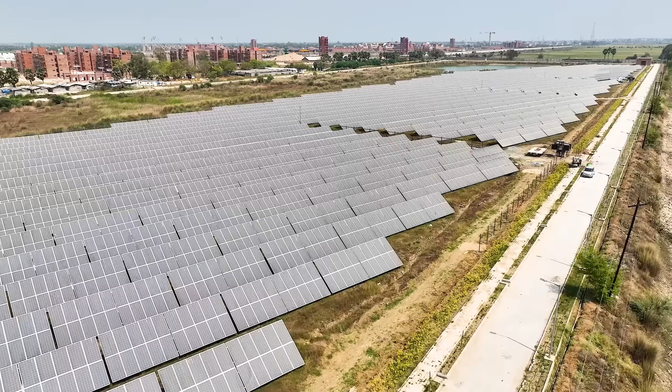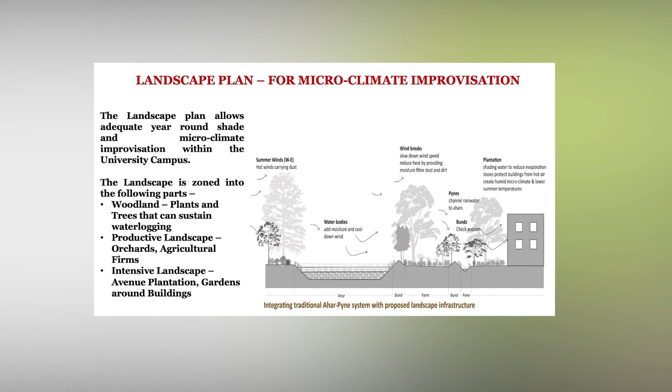The Nalanda University campus is probably the world's largest net zero sustainable green campus. The key sustainability features for developing this net zero campus include net zero energy, net zero water, net zero waste and net zero emission. This hybrid concept, featuring renewable energy sources with the indigenous approach in its integration with various innovative technologies, shall undoubtedly exemplify rational approaches to construction of other upcoming projects, campuses and community construction models in future.

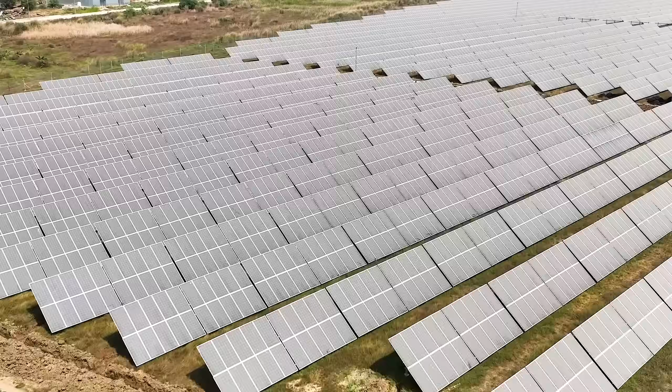The campus combines state-of-the-art technologies with planning principles of the ancient Nalanda University to create a carbon-neutral and zero-waste campus. Some of the most important and indigenous aspects and palette of concepts for passive methods operating at different scales are 6.5 MW solar PV captive power plant, 1.2 MW biogas plant, desiccant evaporative technology for cooling, heating of the buildings,

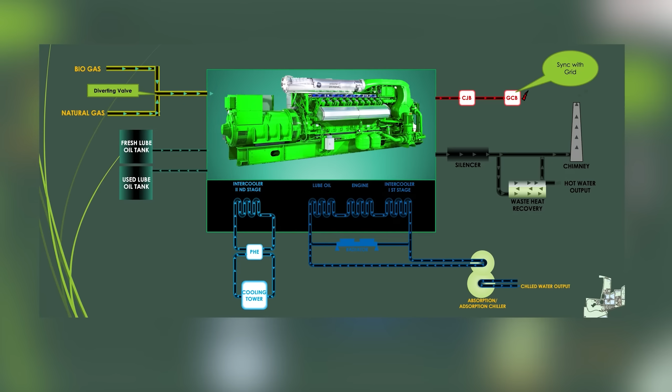solar integrated thermal storage technology for HVAC system, use of compressed stabilized earth blocks instead of common burnt clay bricks, thick cavity walls to increase thermal resistance, climate-appropriate landscape design to reduce potable water demand, decentralized water treatment systems, cooling as well as cleaning of the air through use of selected native plants, building management system, etc.

The main entry gate symbolizes the university as the temple of knowledge acquisition and a seat of higher learning. The first gate along the main road is the first threshold, marking the entry to the campus. The next grand entry gate, 7.5 meters wide, forms the neck, screening people and vehicles in. The large, curved volume creates a sense of pause and calm as felt in the temple entrances.

The academic spine is spanning in the north-south direction of the campus. It houses around 40 various capacity classrooms with a total capacity of 1890 students, varying from 25 to 300-seater classrooms, an examination center, international relations office, placement cell, meeting or discussion rooms of various sizes and other common facilities like faculty offices, laboratories, 100-seater mini auditorium, etc.

In the southern side of the spine, the Grand Sushma Swaraj Auditorium is situated, followed by two guest houses, namely, Campus Inn and International Center. The academic spine is grand, welcomed by a huge semicircular catenary.

The Grand Amphitheatre, with a capacity of around 2,000 spectators, is situated amidst the center of the Kamal Sagar, the central water body. The amphitheatre has a green room and a dais at its center. The structure is surrounded by the huge water body, which gives the audience sitting in the amphitheatre an extravagant picturesque view featuring the lake in the backdrop.

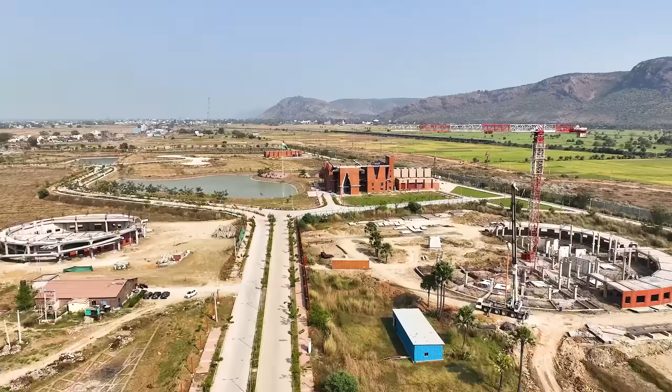The amphitheatre is surrounded by another circular 11 amenity modules, as seen in the aerial view, for informal discussions, small gatherings, chilling out space, etc. The administrative building is the backbone of the governance structure. This building with two wings is situated in the eastern part of the campus. The university administration, comprising of the Vice-Chancellor's Secretariat, the administration, and the finance, are housed in these two wings.

In the northern side of the building, the huge 30 feet by 20 feet Indian tricolor mounted on a 108 feet tall flag mast multiplies the magnanimity and pride of the campus. The ahars and pynes, as a part of the Net Zero Sustainable Campus Water Management System, add to the exquisiteness of the aesthetics of the building. Like the rest of the campus, this building is also environment resilient and reduces carbon footprint, be it in the form of usage of construction material, methodology adopted, or the strategic energy including water consumption techniques.

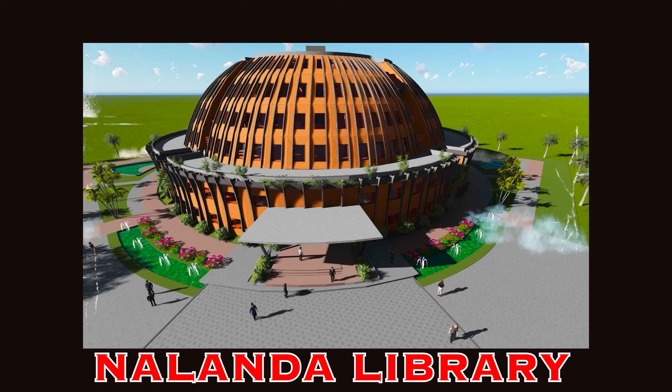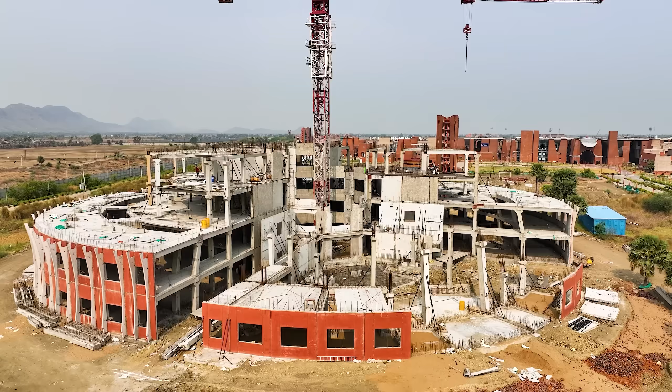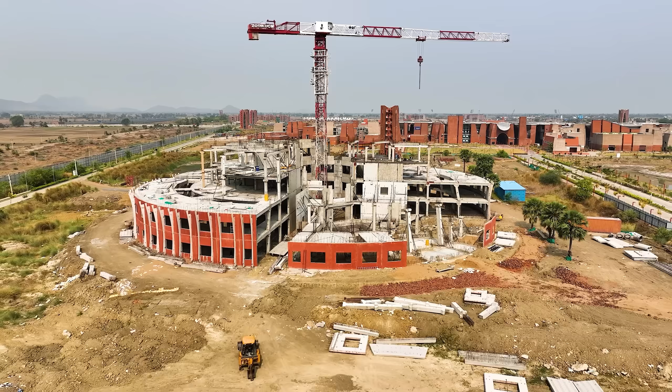The Nalanda Central Library building is envisioned to provide state-of-the-art facilities for study and multidimensional development of intellect and a locus for collaboration. The building has a built-up area of 17,545 square meters. With more than 3 lakh books volume and over 3,000 user capacity, the huge Nalanda Library building is being built in ground plus 5 floors.

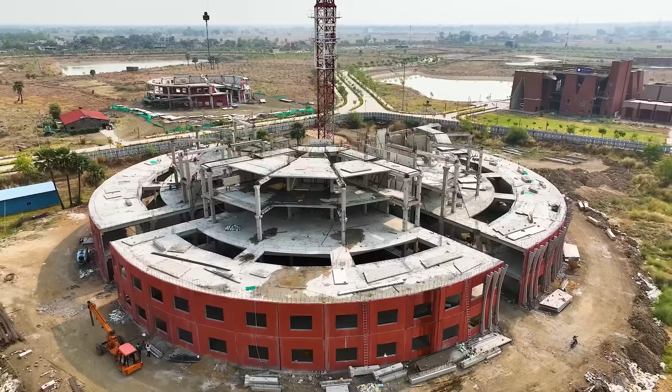The building is shaped as a spherical stupa divided in 4 quadrants with an outer radius of 81 meters at base and height of the building at crown is 26 meters, which makes it probably the biggest dome in the world. The works for construction of this building are in full swing.

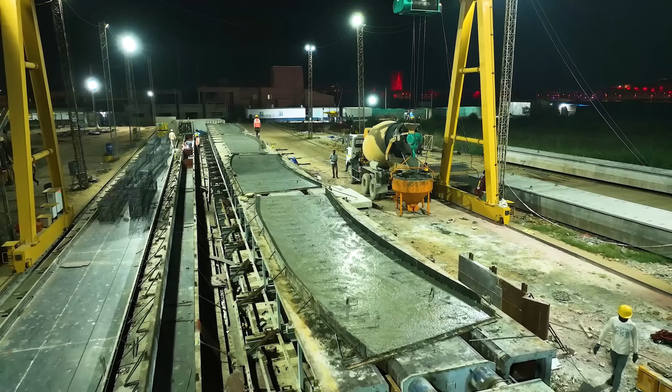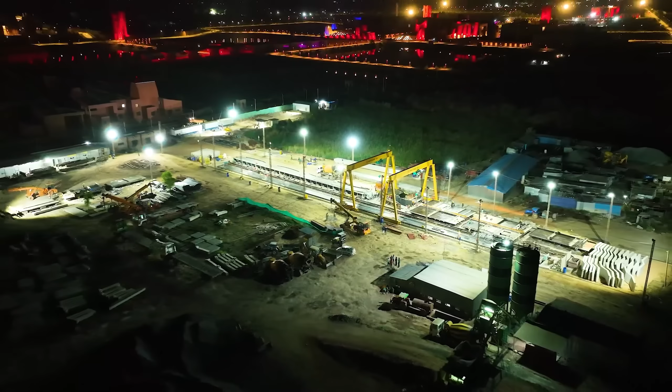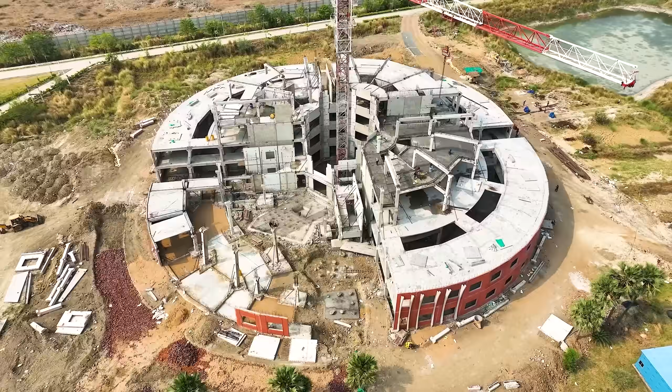In order to fast-track the progress, precast construction methodology has been adopted wherein the structural member pieces of RCC pre-stressed columns, beams, walls and slabs are cast in the casting yard, transported to the site and erected sequentially floor by floor. Over 75% of the civil works for the building is completed and the building is likely to be handed over by end of this financial year.

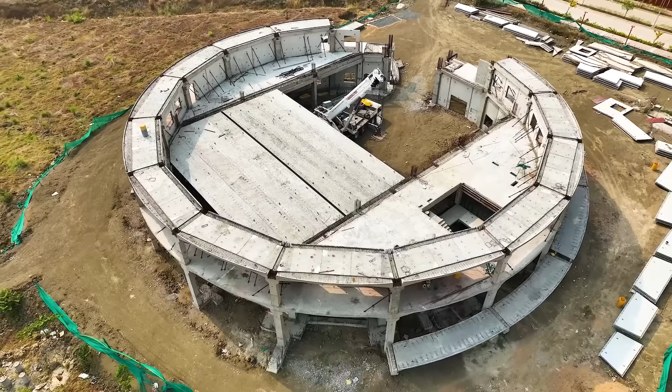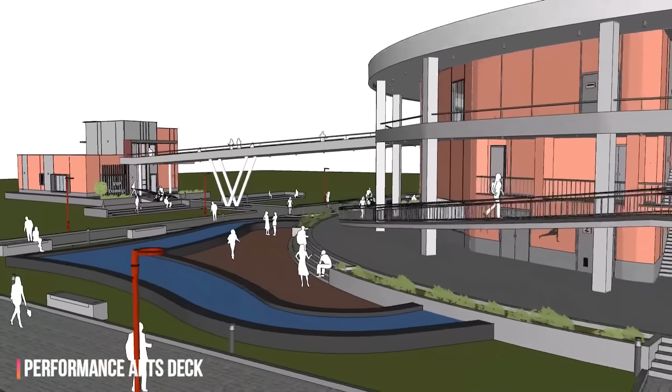The Nalanda Yoga cum Meditation Center is being built right opposite to the Central Library building. Built in ground plus 1 floor, the circular building has a built-up area of 4,186 square meters. The ground floor is a 500 capacity multipurpose hall, and the first floor is the yoga hall with 266 yoga mat capacity along with ancillary facilities like green rooms, cloak rooms with lockers and toilet banks in adequate numbers in both the floors.

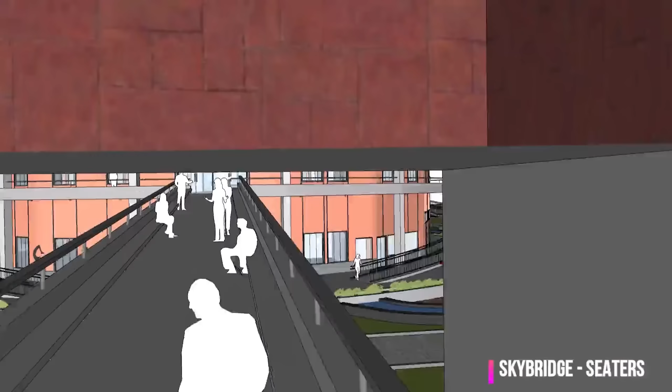For the VIP visitors, a VIP lounge facility is also there which is connected with the yoga hall through a sky bridge. Roof of the building is spherical dome shaped. The yoga center building design symbolizes the 7 meditation chakras and entire planning of the base of the building including the surrounding landscape is based on Muladhara chakra. Roof of the building resembles the Sahasrara chakra.

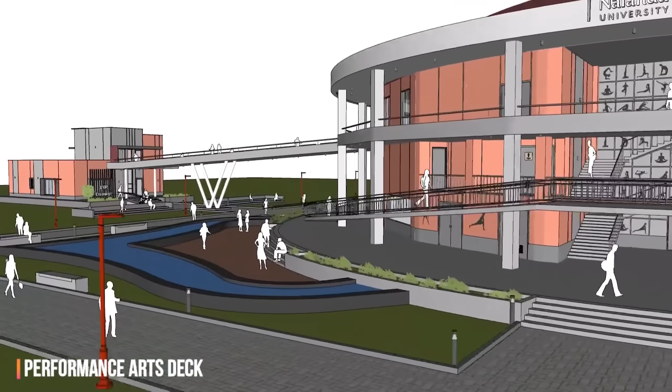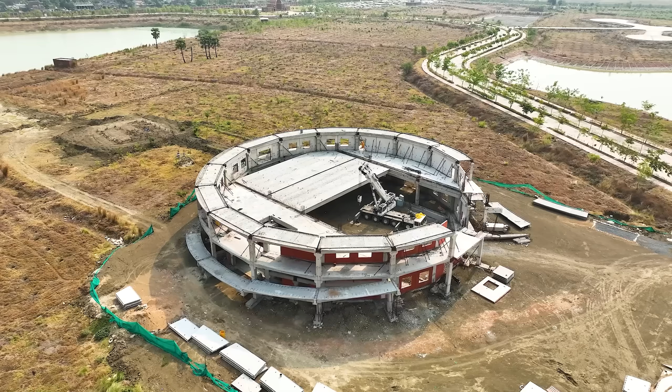The VIP block has been designed and integrated with main yoga block to give a holistic retreat experience. Works of this building are also being carried out in precast system. Erection of both the floors of the building has been completed and overall physical progress of the building is over 80%.